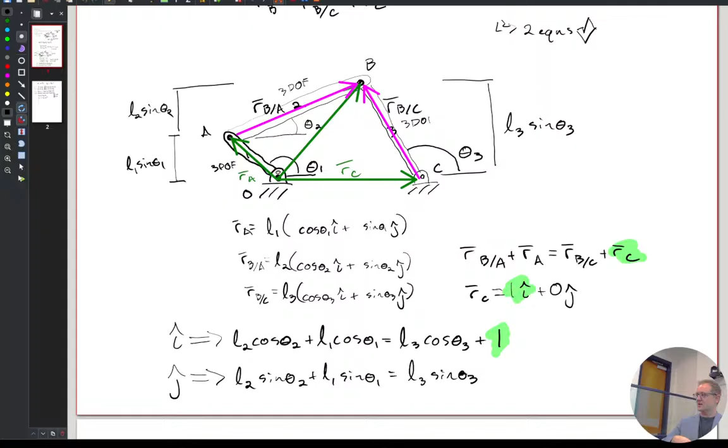And some people were thinking of this as, well, it helps to describe things with vectors, because that's the whole process of kinematics. But here we're thinking about kinematic constraints, like how is motion constrained.

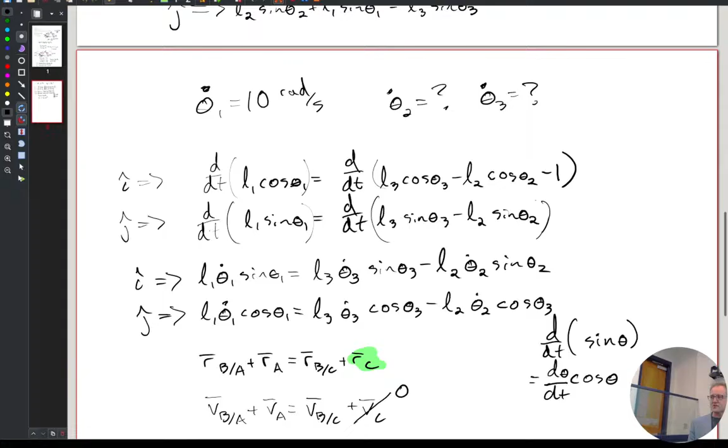Anyway, so we got this. Once we have a constraint on position, we have a constraint on velocity. So we ended up with all the Vx terms have to add up and they have to be equal to each other, and all the Vy terms have to add up and they have to be equal to each other.

So what's next? How do we solve it? And we just need to plug in values, right? We have 2 equations with 2 unknowns. At least we should have 2 unknowns. How many unknowns do you see? 5? No. 4? Maybe 4? 5? Maybe 5? All the derivatives? Okay.

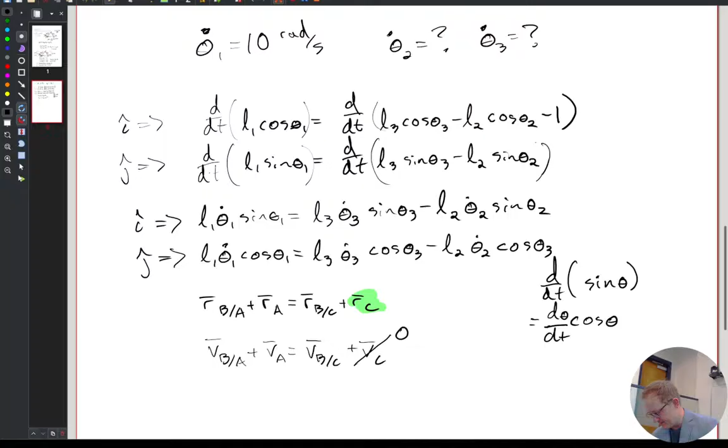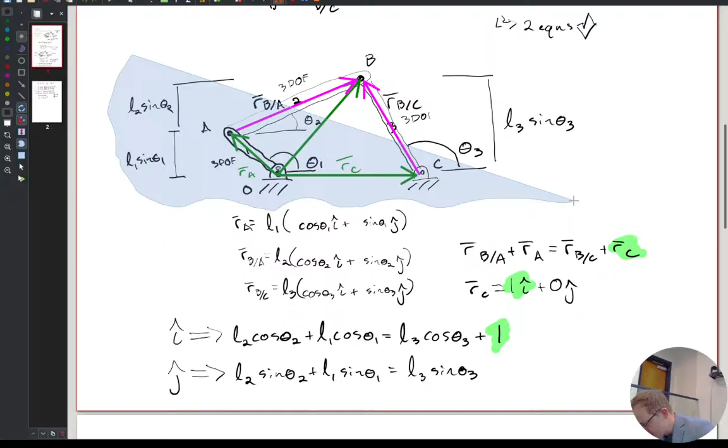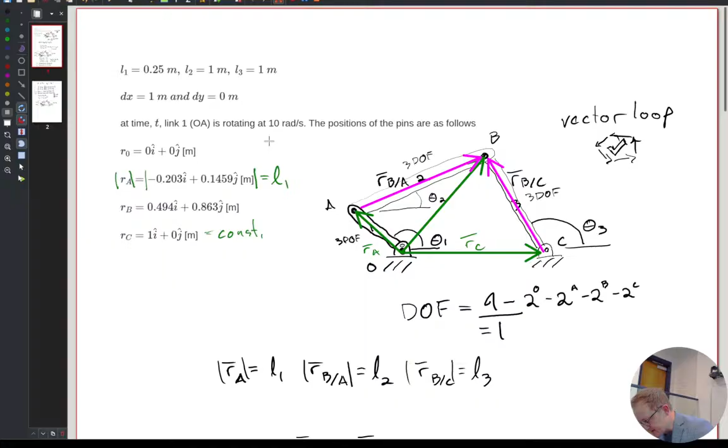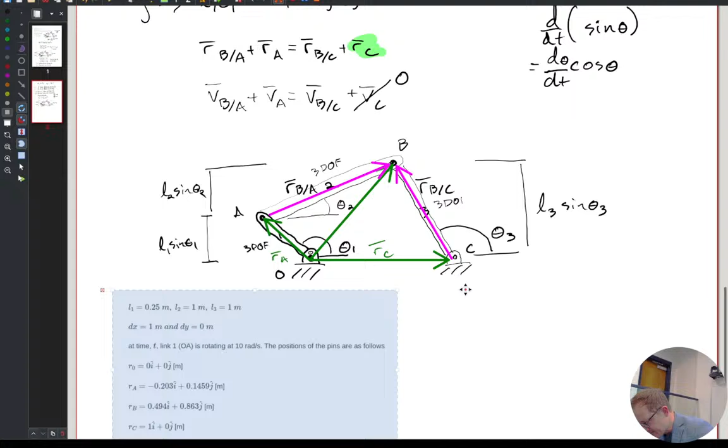All right, so let's grab. Oh yeah, we started writing this out. And then I gotta grab this guy, just so we can start plugging things in. And then I'm trying to organize it so it's all in one place.

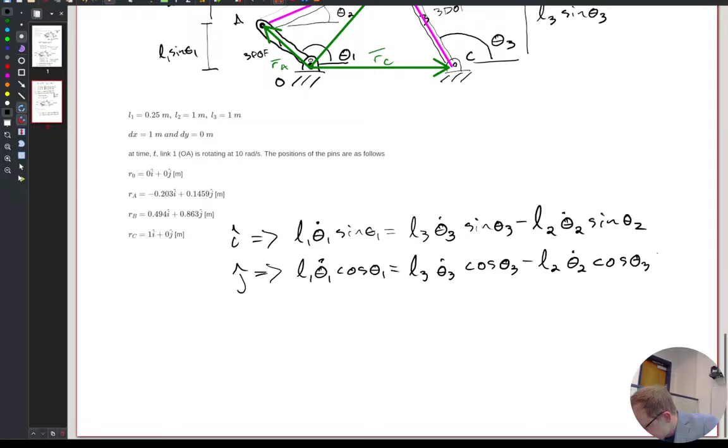So let me plug in the stuff that I know right off the bat. I know L1 and I know theta 1 dot. So here's L1 and here's theta 1 dot. So 10 times 0.25, 2.5 meters per second.

Yeah, thanks. I was just, yeah. I deleted it and then copied it incorrectly.

What about sine theta 1? What is that? Do we know what that one is? We know where everything is. What do we think for the value of sine of theta 1?

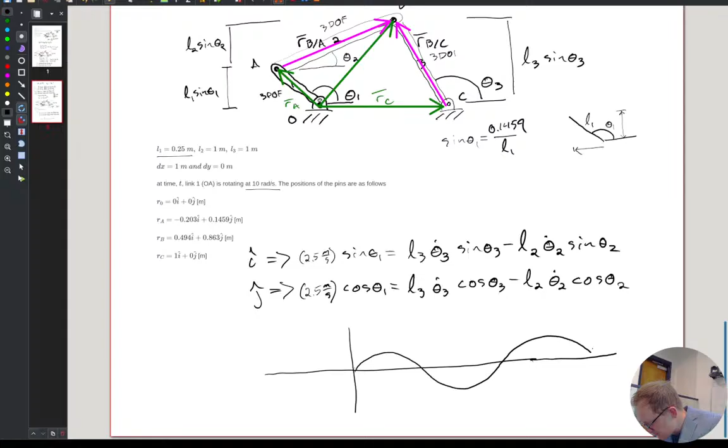So right now we're over here, we're somewhere up in the positive, or wait, we're at more than 90, right? Somewhere over there. So I think even if we subtracted, we'd end up over there. Is that right? Yeah, subtract pi and end up on the other side, so the actual value of sine wouldn't change even if we subtract 180 from it.

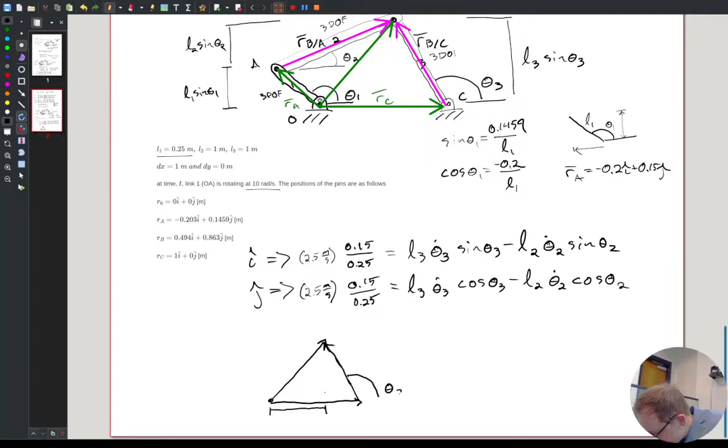I'm just gonna write 0.15. All right, what about sine theta 3, cosine theta 3? Because that's our next step, right? And I'm just writing out some of the stuff that we know. Give myself a little more room. I'm going to use 1 sig fig. So I know the position of point B up here, and I just wrote what components I know about how to get to B.

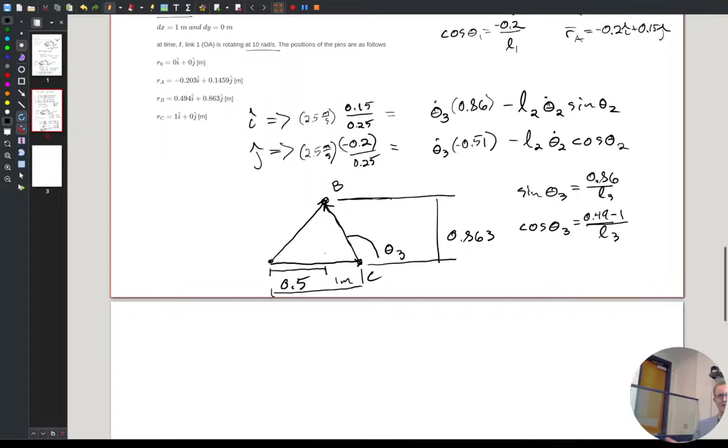With dynamics, sometimes it's easy to get lost in the weeds of all this math and trig and trying to wrap your head around it. But the main thing is, if we know what the positions are, then we should know what the angles are. Sometimes we might get a little confused about where to put what, but we roughly know what these angles should be. Something like that. Just remove the L3s, and plug in the values of the actual X and Y relative positions. What was that? Negative 0.2. And this one is 0.14.

Now you're experts of all these relative positions. So what do we think the next sine theta 2, cosine theta 2 is? It's a nice, consistent tracking angle. If it's 0, you could define the angle differently. Yeah. Okay. Yeah, I don't know.

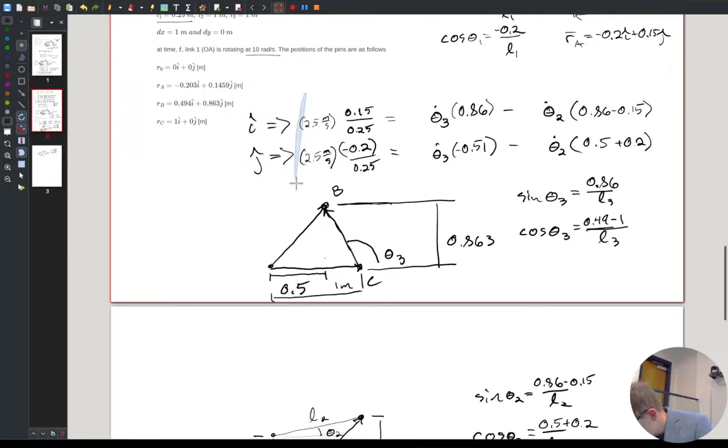And now I can start deleting stuff in here and plug in all those values. Now we finally have two equations with two unknowns. The general process is to solve the constraint equations for position and then solve the constraint equations for velocity, because usually velocity is also a function of position. Cool. And let's grab that, paste it down here.

How do you solve two equations, two unknowns? What's your preferred method? Substitute? Oh, so you're a system of equations solver? Okay, that's fine. No one's like, I love linear algebra? No linear algebra takers? No? Later? Yeah, someone else's problem.

This one is a linear algebra problem, because theta 3 dot and theta 2 dot are two unknowns. So really it's a 2 by 2 matrix and some right-hand side vector. But however you want to do it, try it out. You can use substitution. If you like systems of equations in your calculator, this will work great because it's all linear. You can guess and check. That's actually a pretty solid way to do things. But remember, two equations, two unknowns.

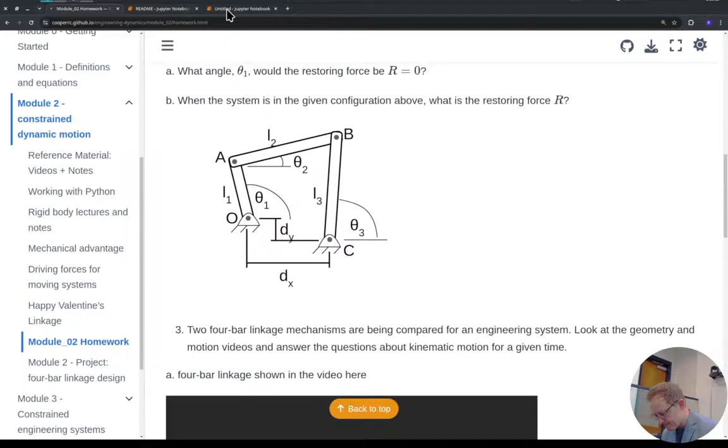All right, so do you want to see a Python two equation, two unknown process, like how to set it up? Python? Yes, no? Are you solving for theta 2, theta 3 in Python, or are you plotting? I was just going to solve for this one case. In the project, we'll solve for it as a function of time, like what's happening.

Do you want to do it in Python, or is that totally useless? We use an online thing. I don't know if it looks like Python, and we would set up the matrix and then reduce it, and it gives us the answer. Yeah, so you can either set it up as, hey, solve this matrix for me, or you can set it up as a series of equations and say solve these equations. So which one do we want to do? Equations? All right. So I'll say my equations.

So the main thing is that we want to create two equations that equal 0. If you're trying to solve a system of equations, it's easy to find 0. It's very hard to figure out when one thing equals another. So in numerics, it's better to set the whole thing equal to 0. So I'm going to say 2.5 times 0.15 over 0.25. I need some more room too.